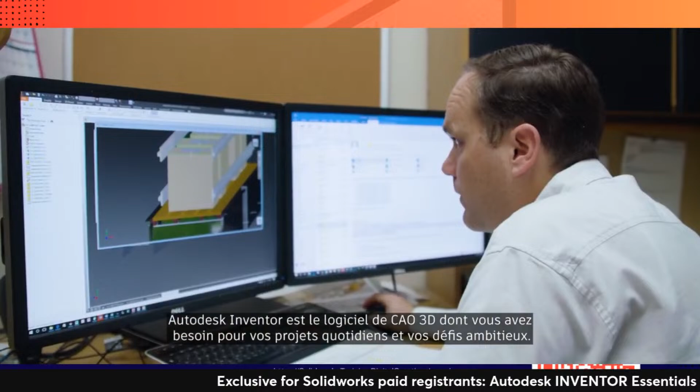From the smallest components to the largest assemblies, Autodesk Inventor is the 3D CAD software you need for everyday projects and ambitious challenges. Inventor puts powerful mechanical design, documentation, and product simulation tools at your fingertips to help you innovate with agility, collaborate effectively, and win more business.

Inventor provides you with a stable and responsive environment to help you get your projects to production faster, with a complete set of tools for sheet metal, welded frames, tube and pipe, and electromechanical, and direct access to a robust content library and engineering calculators.

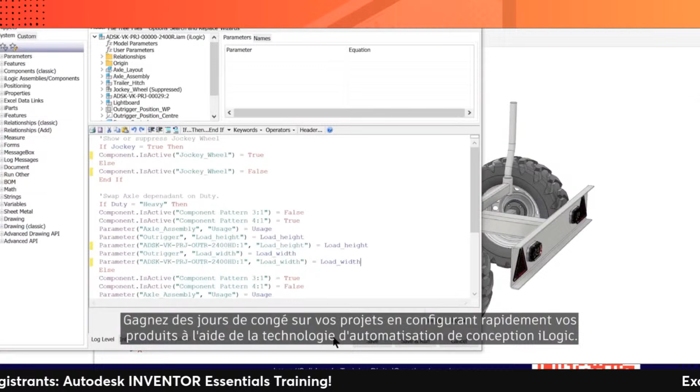Shave days off your projects by rapidly configuring products using iLogic design automation technology. Speed up design reviews with a cloud-based tool that protects your intellectual property. Connect directly with AutoCAD for your project workflows.

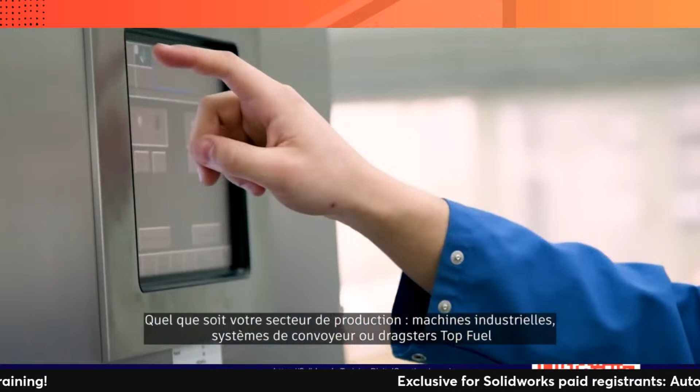And you can extend the power of Inventor with a subscription to the Product Design and Manufacturing Collection to take your designs further with 2D and 3D workflows, cloud-based design and manufacturing, factory planning, and high-end visualization. Regardless of what you make, industrial machines, conveyor systems, or top fuel dragsters, solve your most interesting problems efficiently and effectively with Autodesk Inventor.

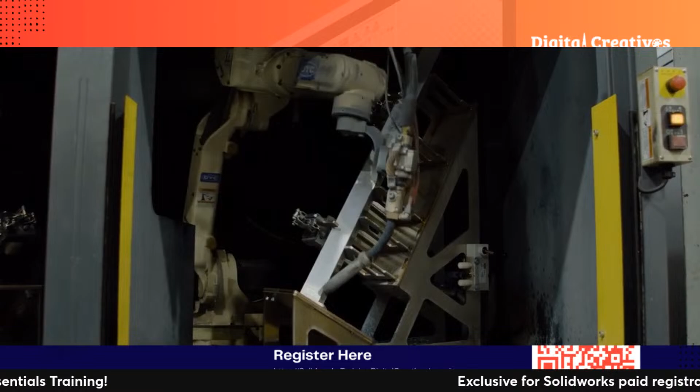A simple project that would have taken 4 hours, we can now do in 20 minutes. And a complex project that would have taken 2 days, we can do in 2 or 3 hours.

We design, manufacture, deliver, and install custom staircases. Every system is new for that customer, so every system is at least a sixteenth of an inch different. We're often one of the last products that gets installed in a home, and if we don't get it right, we can delay them getting a certificate of occupancy.

Without iLogic, it took quite a bit to draw even the simplest of orders. It was very disheartening how much manual labor went into it. We could draw maybe one order a day.

We turned to the Autodesk Product Design and Manufacturing Collection. Autodesk Inventor and iLogic has allowed us to automate the engineering or project management process. A lot of things in stair design are repetitive tasks, and iLogic enables us to automate a lot of those so that a human operator doesn't have to get lost in the minutia.

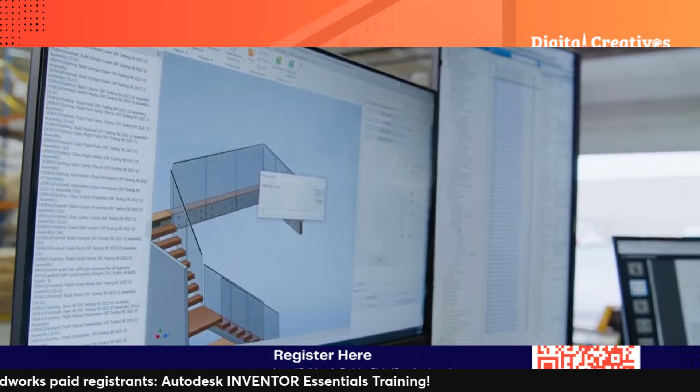So let's say we decided to pull a foot off of that floor, we added a wall there. I would come in and modify the environment here, tell it for length, put in either an absolute, or in this case, if they said we'd subtracted 10 inches, I'd do it. And I would just tell it to update all my glass.

It's going to automatically engineer it for me. It's going to make it so that it meets all building codes that our product is certified for, and it's going to generate shop drawings and production prints for these as it goes. It's that easy. We're manufacturing 10 systems, 20 systems a day right now.

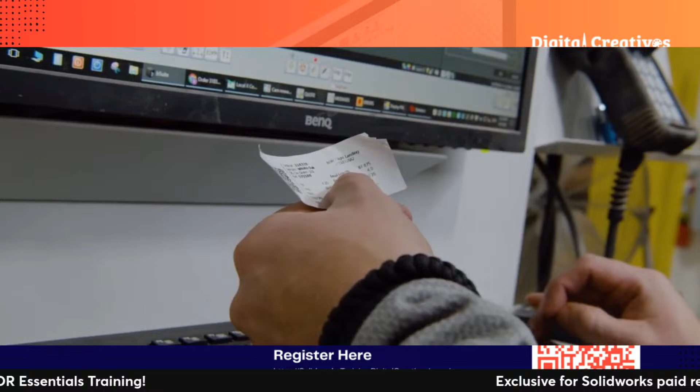With the Inventor CAM, we take the exact model that is part of our automation that we've used to design for the customer, and it's already toolpathed. So that production engineer is just posting that right to the machine. It's a huge time savings, and it's a quality assurance. As we build in more and more automation, we continue to drive down the potential errors that a user can make.

Welcome to Viewrail. Thank you. Have a seat.

We leverage the Forge viewer. It enables the customer to view on a web page on their phone exactly what we are engineering and how it will fit into their space.

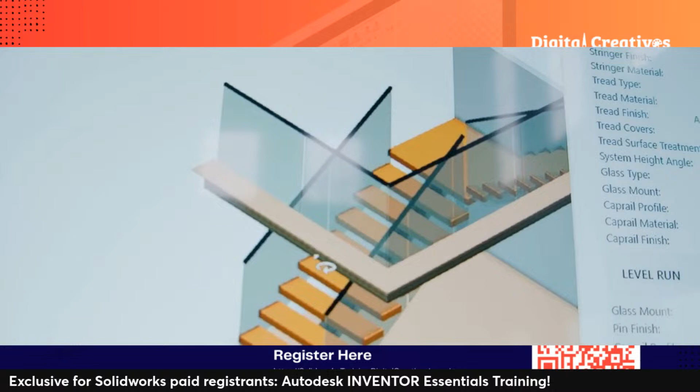This looks amazing. We are now over 10 times the size that we were when we started all of the automation. Then in the next 5 years, we're going to grow from $100 million a year in revenue to $500 million. Automation is critical for scaling at the rate that we're going. We would not be able to do the things that we are doing today and looking into the future without the Autodesk tools.

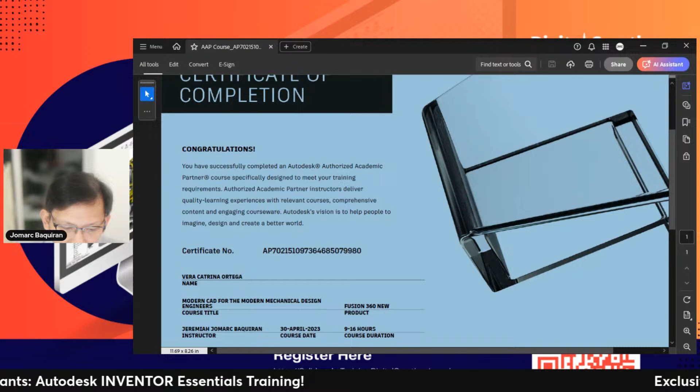All participants will receive an Autodesk certificate of course completion. When we say course completion, you are required to do some tasks. This is not something where you just watch and get a certificate. You will submit the required task. Of course, learning is doing, not just watching. So again, those who participate and submit the required task get to have an Autodesk certificate of course completion.

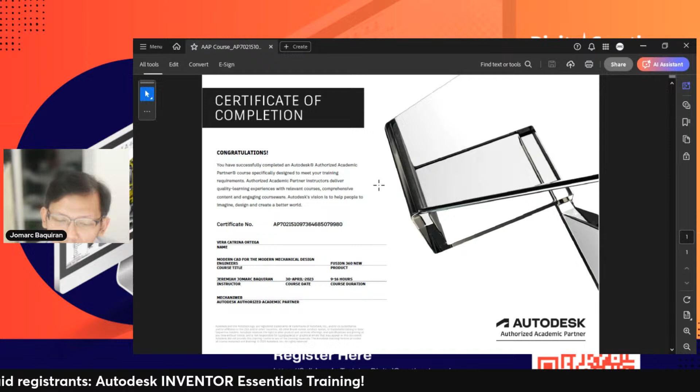This certificate is unique. It has its own serial number. You can place this on your LinkedIn profile. Of course, this is just an example, you're seeing Fusion 360, but you'll be receiving one for Inventor, since this is an Inventor training.

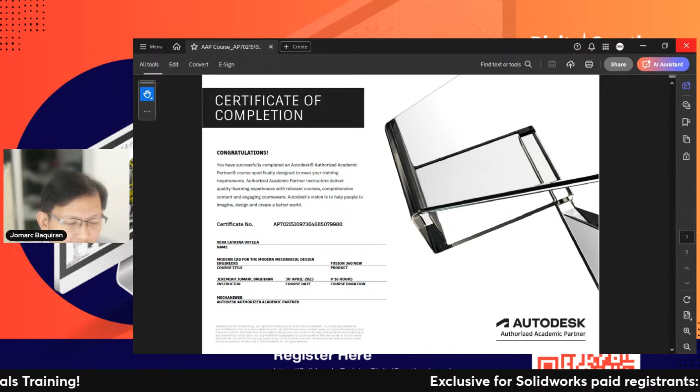Good morning from the Netherlands. If you have someone from Netherlands, I don't know if it's good morning there, but here it's good afternoon.

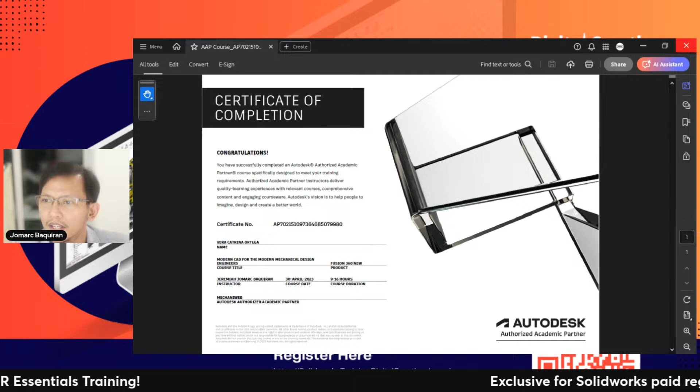Giving you ample time, requesting everyone to start up that Inventor software. I have gone ahead, I already have my Inventor with me. I'm going to close this, going back to the default mode. You can actually open it - I have multiple instances of Inventor opened here.

These cars go over 330 miles an hour and they travel 1,000 feet in less than 3.5 seconds. To accomplish something like that is really tough on the parts. This is not a business where you can make a ton of mistakes. If we don't do our job down to the smallest detail, that driver's life is in our hands. Everything has to be built right. Everybody has to be on their game.

Welcome to Charlotte's Z-Max Dragway for the 4 Wide Nationals. Safety is number one, and then second would be performance. We need to make sure our equipment's strong enough and light enough where we can outperform our opponents. Currently, they're finishing up the track prep. We've got Top Fuel Dragsters up next for you. At the 4 Wide Nationals, we had the Autodesk car on Doug Kalitta's Top Fuel Dragster. My expectation is to win every race we go to.

In lane 2, we have Doug Kalitta with the Autodesk car. So Inventor is helpful because races in our league can be decided by 1,000th of a second. So if we find something on a part to make it a little bit stronger, a little bit lighter, or a little bit better than what everybody else has, that makes us a big part of winning races. Kalitta crossing the finish line first, clocking in over 330 miles per hour. Seeing something get made and then get put on the race car and us going out and running over 300 miles an hour, that's pretty neat to see.

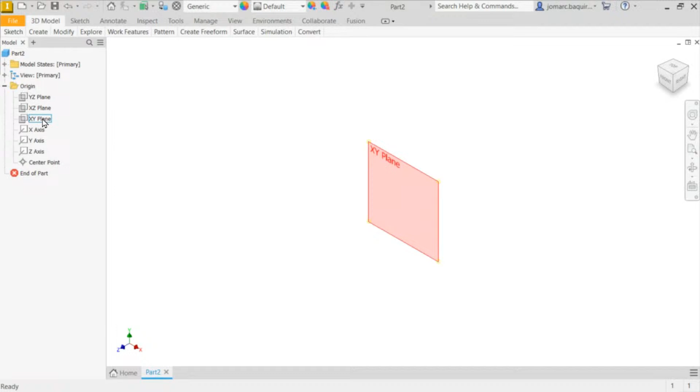Let's first be familiarized with the navigation. I want you to head over to the XY plane. Again, on the browser or the model tree, click on XY plane, right click and select New Sketch. So again, our view is normal to the XY plane.

I'm going to cycle over these controls and I want to see the full view of my ribbon. Again, I click this minimize to panel button. So again, for the absolute beginner, let's get ourselves familiarized with the controls and navigation.

I'm going to click on rectangle. Left click here, left click here. I'm not too concerned about the dimensions. The rectangle tool is still active, so I'm going to hit escape and select finish. Whenever you see this green check mark, it's a visual cue that we are in sketch mode. So I'm going to click on finish.

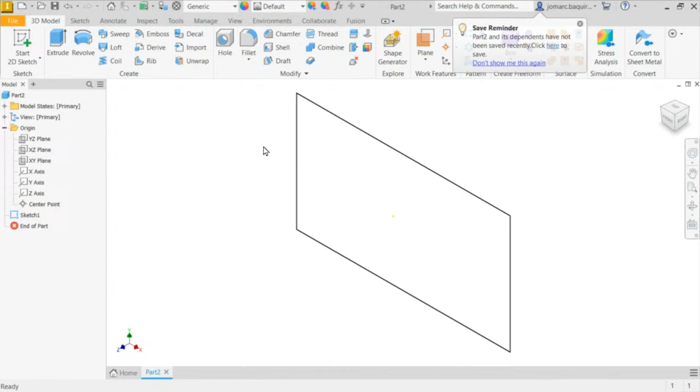Okay, next I'm going to hit extrude. It automatically selected this profile. Let me pull this arrow, giving this a height or depth, and select OK. So as quick as that, we have created a 3D model coming from a 2D sketch.

For the controls, if I roll out my scroll wheel, I want you to roll this until it's completely far away. To bring this back to the full extent of our screen or canvas, I'm going to double click on my middle mouse.

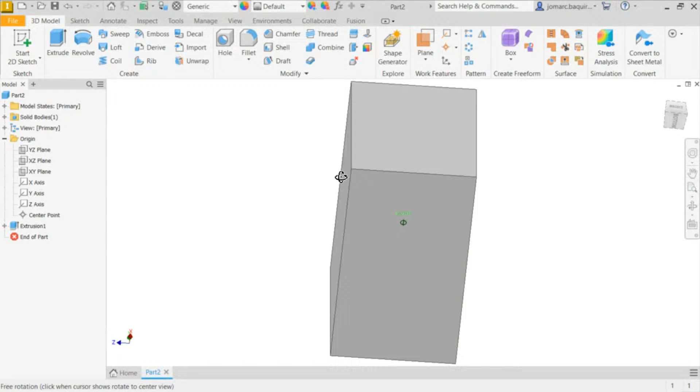Okay, what I did was double click on the scroll wheel or middle mouse. To rotate this, it's shift and holding our middle mouse. I'm rotating or orbiting this 3D model. To go back to the default isometric view, it's hitting F6. And if I would like to pan the view, it's holding the middle mouse.

Notice that hand when I'm pressing the middle mouse button - so I'm panning, currently rotating. And if I hit F6, it goes back to the default isometric view. So feel free, giving you a few minutes, few seconds to be familiarized.

Okay, so hope you are familiarized with the navigation already.

Next, notice as well on our model tree, a recording of our actions was made. Initially, pay attention to your left side of the screen. Recall we created a sketch, right? And then we created an extrusion, and that sketch was consumed by this extrusion.

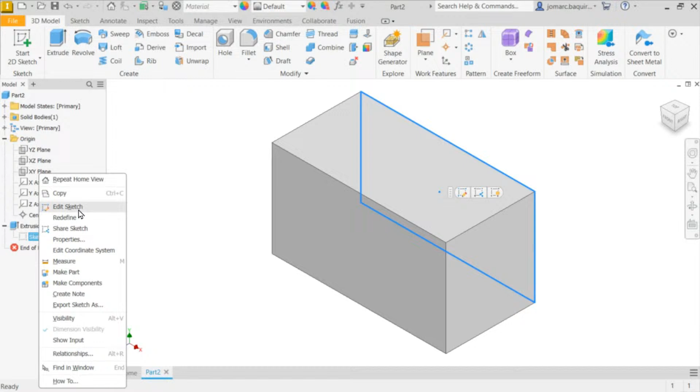So we're now again in sketch mode. Again, the visual cue is this green finish check mark. I'm going to create a window selection - same as AutoCAD. This is window, and this is window crossing.

Notice the difference: for window selection, the one to be selected needs to be fully inside this rectangular pinkish rectangle. So if all of this rectangle is inside this window, everything will be selected. For crossing, whatever this window hits gets selected - so if I create a window selection here, this side, this entity or line will not be selected.

So again, creating a window selection, right click or hit delete. I want you to select delete. So we're creating a fresh or new sketch.

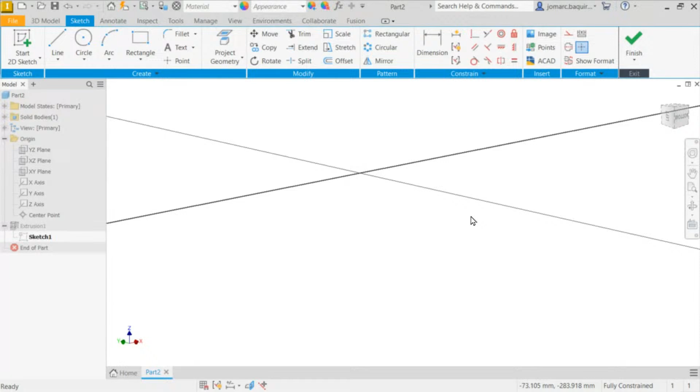Since initially we were in the XY plane, I can simply head over to the view cube and select front. So heading to front view.

Now let's create some sketches. Of course, the mastery of part modeling and assembly modeling all starts with the sketch. Everything starts with sketch, even for those in animation or character modeling. If you have a character, it all starts with the sketch. So let's say the character model will be made in Maya 3D. That 2D sketch can be inserted into Maya to create that 2D into 3D. So it all starts with a sketch.

For me personally, my definition of sketch is a quick drawing. If your boss told you to create a sketch of a table, it's a quick drawing of a table. So again, we are in sketch, meaning we have to be quick, or hoping in the future you have the ability to do quick sketches.

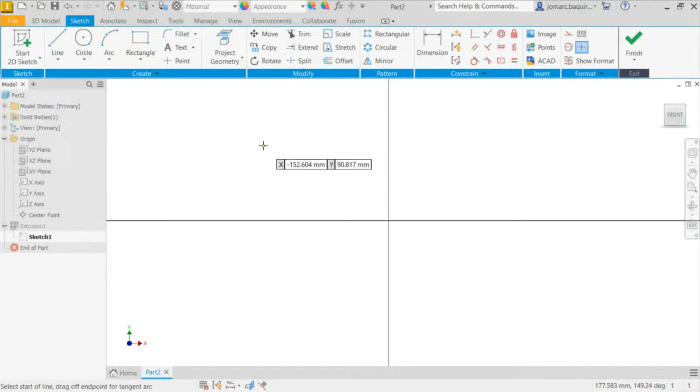So for now, I want you to select line. Similar to AutoCAD, the shortcut key for that is L. Again, hitting escape to disable that command. So notice if I hit L...

This command is highlighted. I want you to left click here, one left click, double left click. And if I'm going to create another line, left click, left click, left click, double left click. So if I simply do a left click, I am creating a chain of lines. And if I ever wanted to terminate this chain of lines, I'm going to double left click.

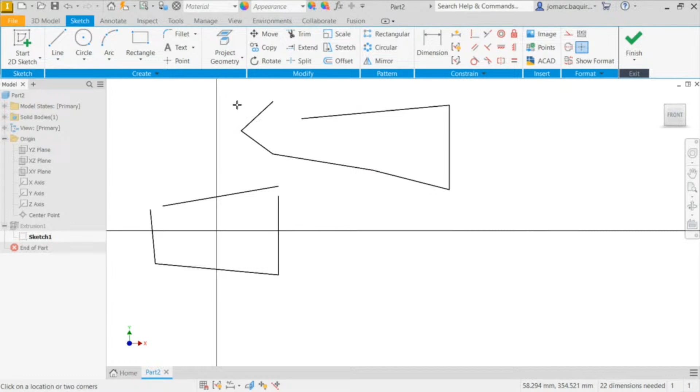So I'm going to delete these lines. To delete a line, simply select that line or create a window or crossing selection, then hit delete. So this is what we have created so far.

By default in Inventor, it adds constraints, and those constraints are initially turned off. So if I hit F8 and F9 - F8 is for the constraints to be visible, and to turn off its visibility it's F9. So notice here, if I select F8, automatically one of the lines that I have created has a vertical constraint.

Which means when you say constraint, it's sort of like you are shackled. This is constrained to be perfectly vertical. So whatever I do, if I select this endpoint and drag this around, select the whole point and drag it around, it's completely vertical. And again, our set of constraints are located on the top ribbon under constraint.

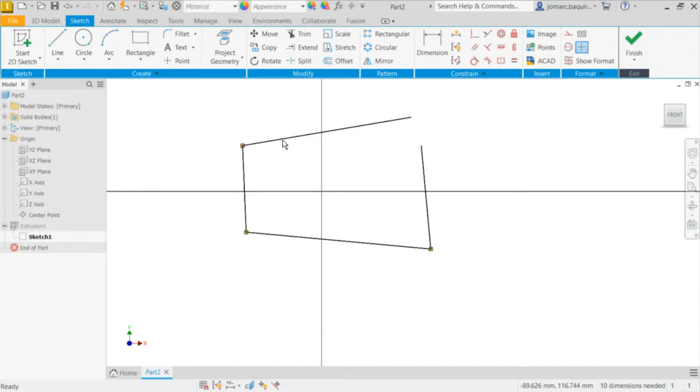So the difference between Inventor and SolidWorks is there's a consistent pressing of F8 and F9 for you to not accidentally select the constraint itself.

Next, I want this top line to be perfectly horizontal. So I'm going to head up, selecting horizontal, or the minus sign, selecting this again to be perfectly horizontal. Same with this line, horizontal. And for this to be vertical, I'm going to hit I, or simply head over to our constraints, select vertical constraint, and select this line.

So our objective here is to create a rectangle. Next, I'm going to have these two endpoints coincident with each other. Selecting coincident, selecting this point and this point, hitting escape.

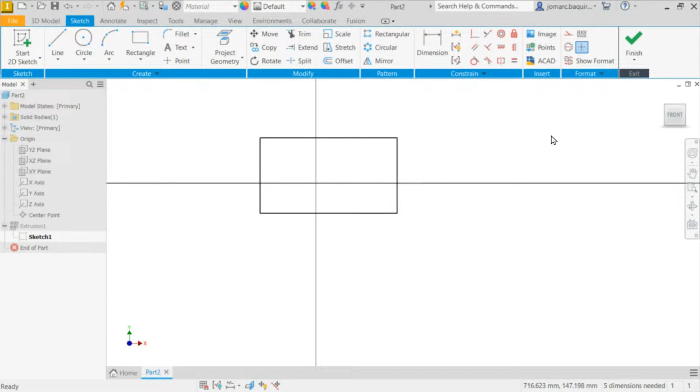So next, how about creating some two diagonal lines here? Left click, double left click, double left click.

In addition to that, we'll be having an activity, or your assignment. So like for this challenge...

For this challenge, the top horizontal line and bottom horizontal line are actually parallel as well. But of course, another method of making these two parallel is, of course, making them both horizontal.

So again, demo for making things parallel - selecting parallel. Notice the constraint symbol. And if I drag this, they are perfectly parallel with each other.

So, question: what is the angle created in a perpendicular situation? I'm going to hit L, create another line coincident with this diagonal line, and double left click.

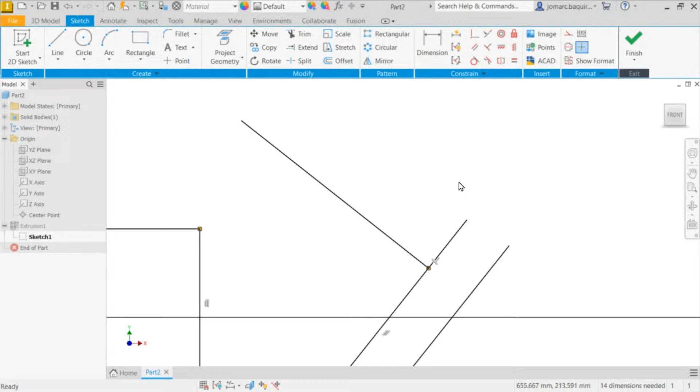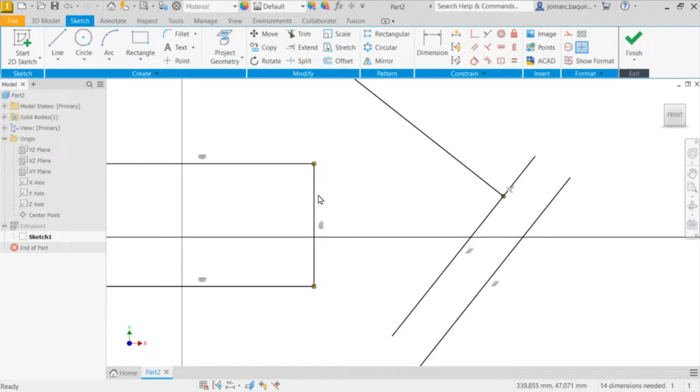Zooming in. Notice if I hover over the constraint symbol, it highlights the two entities sharing the same constraint. This line and this line are both in a perpendicular constraint. Hovering over here, both these diagonal lines are parallel. Hovering over here, this one is horizontal and vertical.

Requesting everyone to follow along. We're currently familiarizing ourselves with the constraints. This is very essential. You'll have difficulty in assembly and part modeling if you don't have a grasp and mastery of constraints. Of course, in SolidWorks, it's called relations.

Okay, perpendicular done. Let's create a new line again somewhere around here. Left click, double left click. And my next intent is to have this line and this line collinear with each other.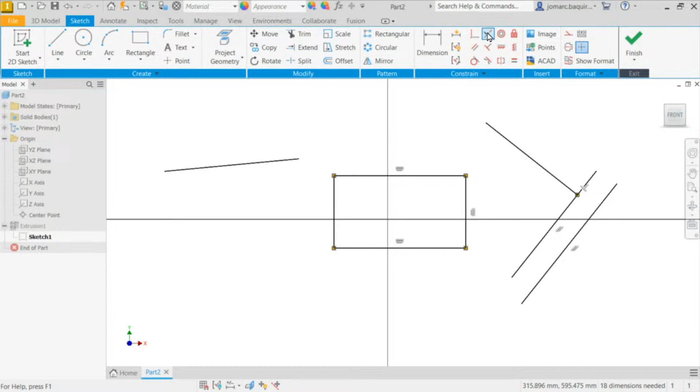The best way to do that is heading over to constraints and selecting collinear constraint, then selecting this line and this horizontal line. Hitting escape, moving this.

Turning the visibility off for the constraints. I'm dragging this line on the left. Notice the other line on the right is following the up and down movement of this line, because they are both collinear with each other.

Okay, next I'm going to delete these lines, selecting and deleting them all. Now about creating a circle. Let's create a circle. Shortcut key for that is Control-Shift-C.

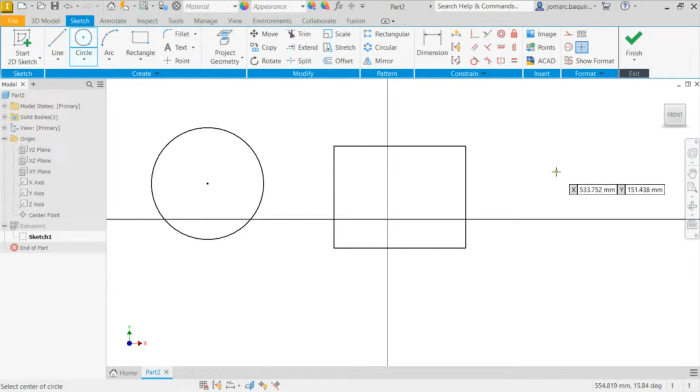Creating another one here, another one here. I want you to create 2 circles. Because this doesn't have any dimensions yet, the diameter is not yet defined for these 2 circles. So I can resize them by selecting its circumference, resizing this, placing it here, placing it here.

Again, feel free to experiment, to be familiarized. Taking things slow.

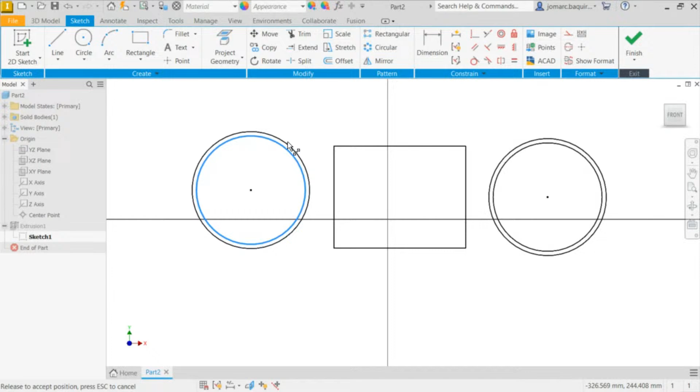Okay next, let's discover equal constraints. Selecting equal, selecting this circle, hitting escape. If I resize the right circle, because they are both equal, what I do to this right circle is the same. So both are now sharing the same diameter. This applies to everything as well.

Same as with lines. So creating 2 lines, another line here. I want them both to be equal in length. Selecting equal constraint, selecting this line and this line. So both now share the same length.

Deleting these 2 lines. Same as well when you create arcs. The radius of that, if you apply equal, definitely both of them would be equal.

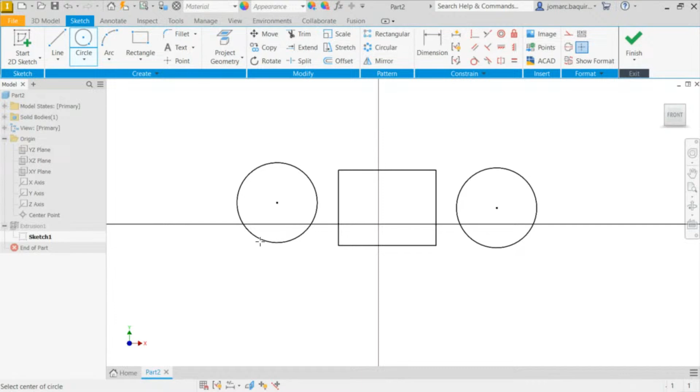Okay, going back. We now have discovered the equal constraint. Let's create another circle, this time much smaller, somewhere around here. Again, requesting everyone to follow along. We now have 2 or 4 circles and a rectangle.

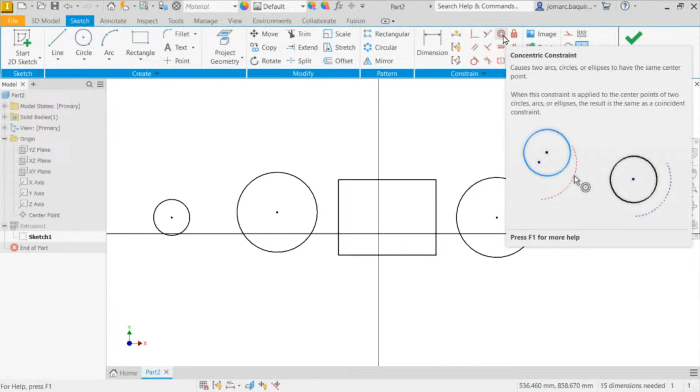Next, let's discover concentric. For concentric, the center points of those 2 circles become coincident, that's actually what concentric does. If I select concentric, selecting this large circle and this smaller circle, notice the center points of these 2 circles are now coincident with each other.

Repeating what we did to the right circles, selecting this, selecting this. The last selection will be the destination of the first partner of that circle.

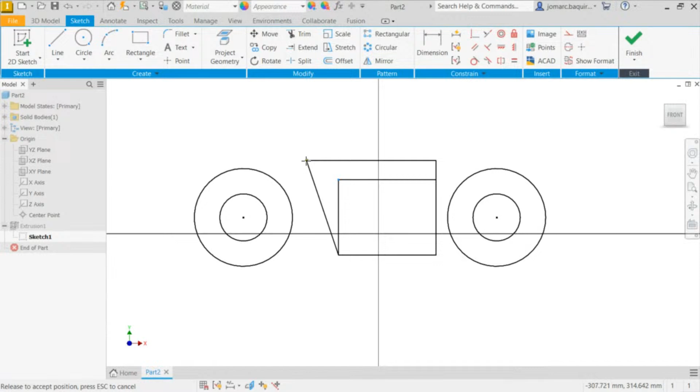Again, I can resize this. Notice this line is not perfectly vertical, so let me add the vertical constraint to this line. Hitting escape, resizing this.

Okay, next, how about discovering tangent constraint? Selecting tangent, I'm going to select this horizontal line and this circle. Hitting escape, turning on our constraint visibility with F8. Hovering over, notice this circle and this horizontal line. F9 to turn off, and if I drag this line up and down, notice the effect of the tangent constraint.

Let me apply another tangent constraint to this bottom horizontal line and this circle. I'm going to hit escape. Now if I resize this circle, notice the effect again.

I want you to drag and resize. Again, requesting everyone to follow along. If I move or select the center point, notice the effect of that tangent. Let's apply the tangent as well to this other side, selecting horizontal, the circle, horizontal, and the circle.

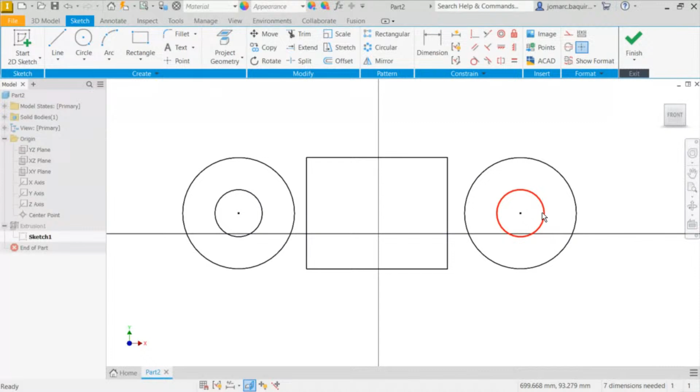So if you see that prompt earlier, a few seconds ago, it's mentioning an over constraint, a conflict of constraints.

Okay, let me resize this, move this around here. Next, I want you to place the center point at the midpoint of this vertical line. There's actually no midpoint constraint, it's located in the coincident constraint. Our intent is to have this center point be coincident with the midpoint of this line. So selecting coincident, selecting this center point and this midpoint.

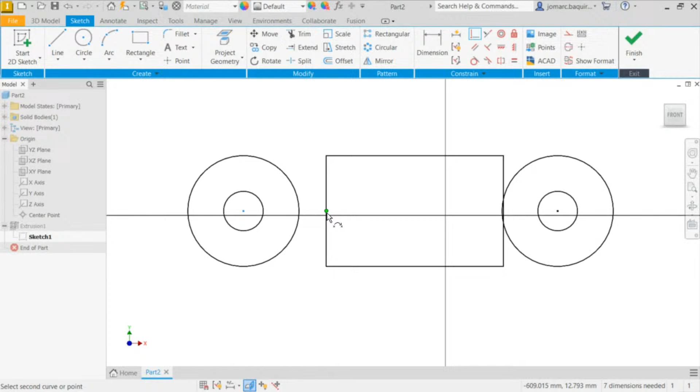If I hover over this vertical line, there's a green dot indicating that that's the midpoint. So selecting this, repeating the steps here as well, selecting this center point and this midpoint, hitting escape. Let's resize, let's drag, let's check.

I can also create a window selection and drag them all at once. Dragging them somewhere around here.

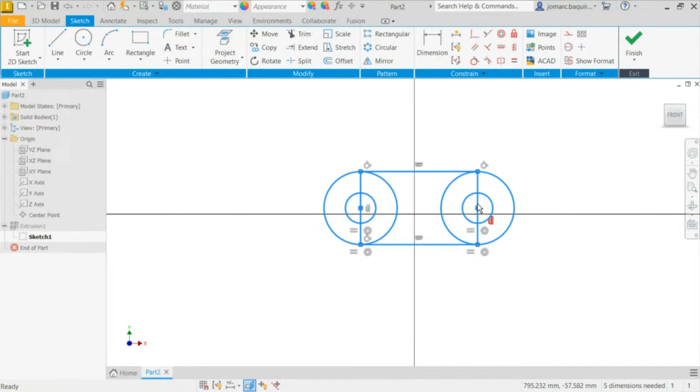So notice earlier I mentioned about the 3 initial planes, and recall in AutoCAD when we create a line and we want it to be at the 0 coordinates, we do at 0, 0. Recall that? When we want the line to be placed at the origin, XYZ 0, 0, 0.

So the difference with Inventor, we can do that right away. Actually that 0, 0, 0, the XYZ 0 coordinates, is hidden by default, and it's actually this center point. Notice that yellow dot, that's actually the center point.

And obviously for this sketch or geometric figure, the center point of the sketch is of course somewhere around here, the geometric center. Now it's a good practice to have those geometric centers and the center point, the 0, 0, aligned. But of course it depends on the need. By default I want you to have that thinking that geometric centers and the origin, it's preferably having them both to be coincident.

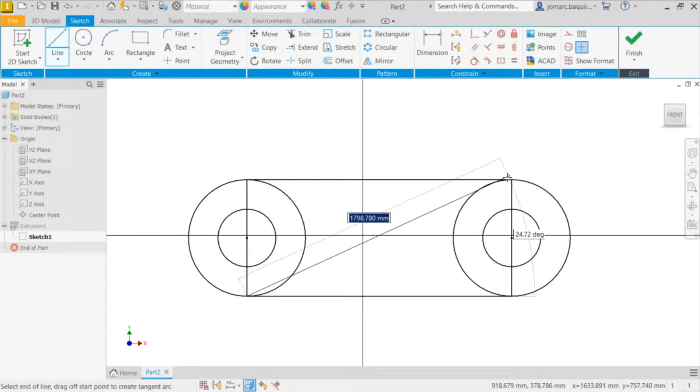So next, the next task would be I want the geometric center of this sketch to be coincident with our center point. So one way I am seeing is to create a line coming from this endpoint going to this endpoint.

Next, I want this diagonal line's midpoint to be coincident with the center point. So to do that, I'm going to hit coincident, select that midpoint, that green dot, left click. And because the center point is not visible, I'm going to head to our model tree and select center point. Again, I have selected center point.

So now, this is perfectly at the center together with our center point, 0, 0.

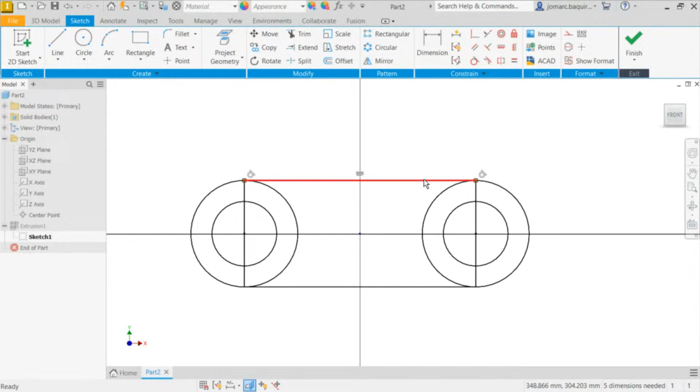Another way I'm seeing is to possibly delete that line, align them, align this, the midpoint of this line, align it vertically with our center, same with this line as well. So let's check. I'm going to select vertical constraint, selecting this midpoint and our center point.

Let's check. Okay, and I think I'll be having an over constraint if I select this center point and our center point. Okay, so they are actually...

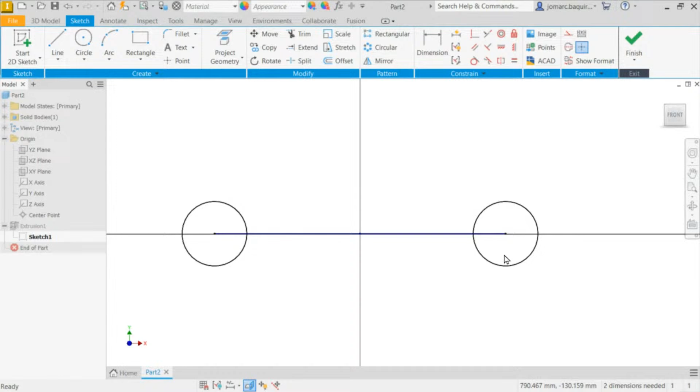So this is why it's important to resize and drag things to check what constraints needs to be applied or what's missing, what needs to be done. So I'm seeing here, I no longer have the need to apply the horizontal constraint.

And notice as well, our entities are in the color of black. Everything is black right now.

So next, we now have our target shape. Let's now fully define this geometry or geometric figure by selecting D, or heading up again to constrain.

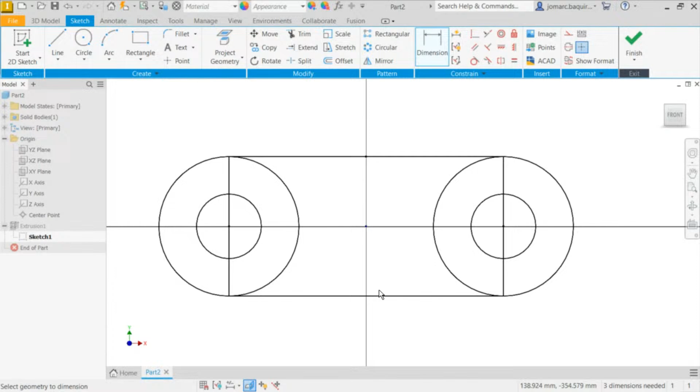On the left side, there's dimension. I'm going to select this. How about selecting these two vertical lines? I'm going to key in 100. Zoom in, or I'm going to pull this dimension over here.

Again, hit D for dimension, selecting this circle, and I prefer the dimension to be 50. So notice the change of colors, from black it's now dark blue. And the remaining black entities in color black are these two circles.

So to turn this into dark blue as well, I'm going to hit D again, define this, its diameter to be 25. So notice everything now is in dark blue. I'm going to hit F6, revolve.

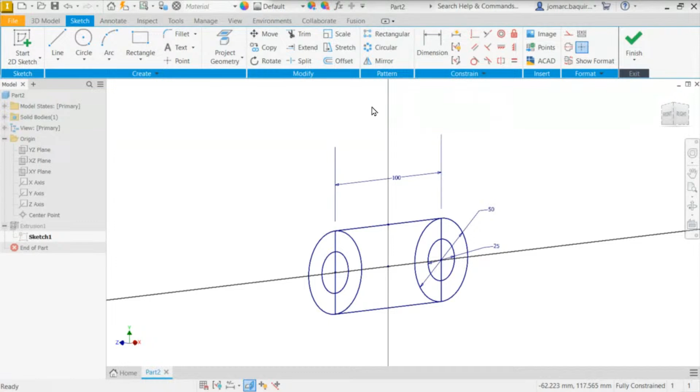Okay, head back to front view. So from here, I can now hit finish sketch. And of course, we have an update.

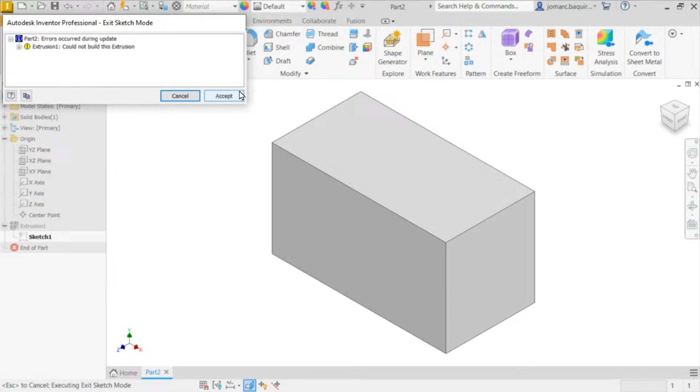Okay, this was previously a rectangular extrusion. Now it's a sort of slot type. I'm going to hit accept. Now I am forced to go back to extrusion. I'm going to hit edit feature and reselect these profiles.

So these profiles, okay, so again, right click, edit feature, creating a window selection. Again, I have created a window selection. And from creating a window selection, I have selected 9 profiles.

And as I mentioned in 2D, we always prefer things at the center. Same as well in 3D. So I'm going to change the direction to symmetric. Let me drag this arrow. I prefer this to have a thickness somewhere around, what about 10? Okay, I prefer 10.

Hitting enter. Hitting F6 for isometric view.

So, of course, in design, aside from the only constant thing in this world being change - definitely in design, there's always changes. May it be from the customers, from your boss, and I hope not from your wife.

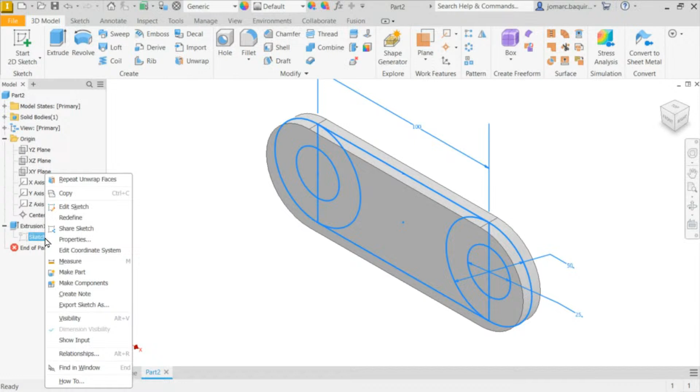Okay, so heading back to sketch, let's say there's an update. We're required to have the pitch to be 110. So double clicking 100, double left click again this dimension. Let's say I prefer 110. Hitting enter. So notice it updated, selecting finish, and it's now 110.

So I know that because if I select this edge, okay, or under inspect, I select measure. If I select this edge, of course, confirm it's 110.

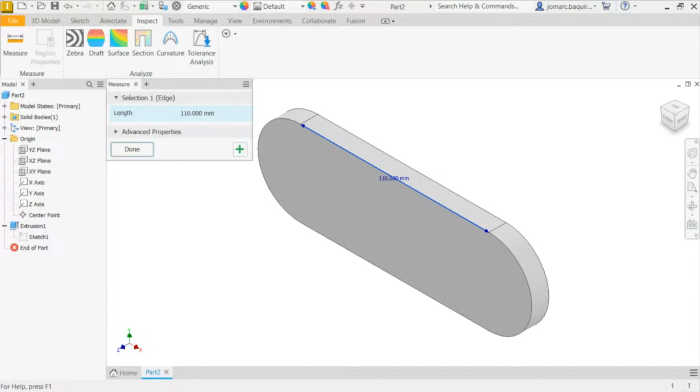Yeah, okay. So I want you to of course recreate what we have created. So it's currently 110, 50, and 25. Shout out as well to Sir Anthony Tubera.

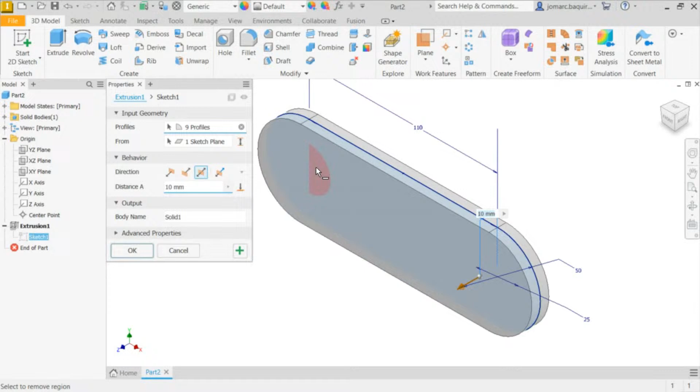Again, so right now I prefer removing this additional profiles. So control left click, heading over to the right side, control left click, control left click. So 5 profiles are now under extrusion 1. So we have now created that hole.

So selecting OK. Again, I want you to update our activity to an extrusion having 2 holes.

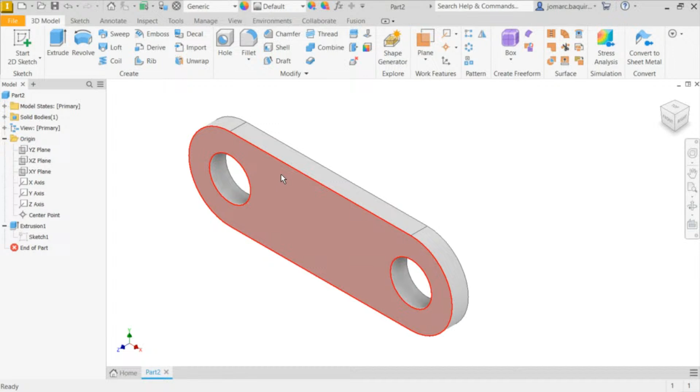Okay, so let's now move on and let me give you a simple activity. I want you to recreate this 2D challenge. Okay, so let me hit Control N. I prefer this to be in metric, standard millimeter.ipt, double left click.

Okay, again, sketch is a quick drawing. So if I was given this challenge, I'm going to be quickly hitting L for line. I'm going to sketch, I prefer on the XY plane. And I'm going to create this type of sketch. I'm going to create a circle here.

So this is my quick sketch of this challenge. And notice as well for this challenge, again, all dimensions are referring to this point, which means I'm going to have this point and that point, which is our center point, coincident with each other. So I'm going to select coincident, selecting this point and our center point.

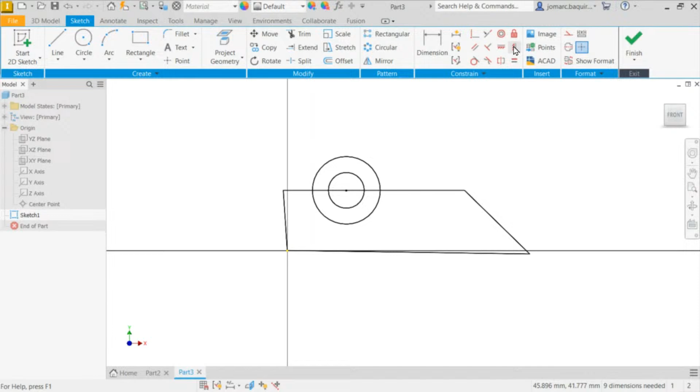Okay, so next, of course, applying the obvious. This needs to be vertical. I'm going to select vertical constraint. This one to be horizontal. This one to be horizontal. And from here, again, I can now apply the dimensions.

So what are those dimensions? 120, 25, and 30. So D, 120, 25. Again, make it a habit. I'm going to hit undo or delete this.

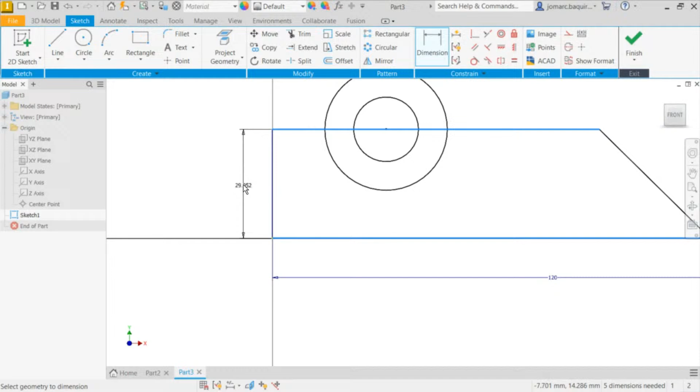What is actually indicated as 25, it's not actually these points. So imagine if this is undergoing QA, I have a caliper and I'm going to measure these two distances. It's actually the caliper will land on this line and this line. So that's why I'm highly suggesting, instead of selecting these 2 points, when you create that 25, you should select this horizontal line. Again, 25.

Dimension still active, selecting this line and this center point to be 30. Okay, what else? This one needs to be 45.

Okay, showing you again the activity. We're missing the 20 diameter, the radius, that arc to be 20 in radius as well. So again, 20 inside. So D, this one to be 20.

And again, the challenge, notice the challenge. It's actually one circle only. So to do that, I'm going to head over to modify, select trim. I'm going to trim out this line, this arc, this line, this line. Again, make it a habit to select the entities and move them to check.

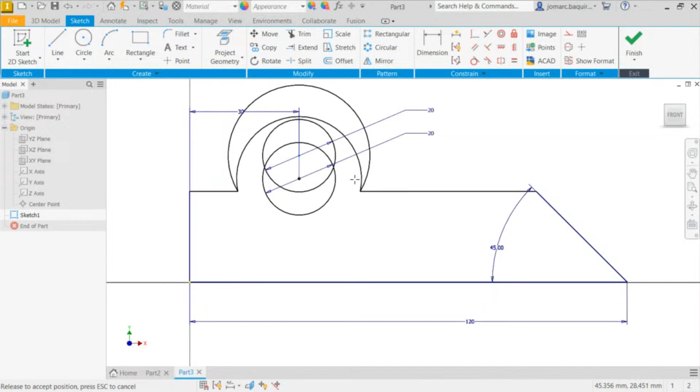So moving this. Okay, the question is, my question to our participants: what constraint is needed for this situation? So the answer, to prevent this or to have this line aligned horizontally, as I've mentioned, we need the horizontal constraint.

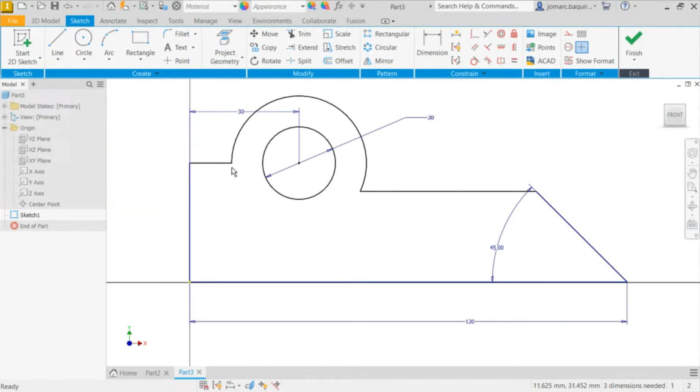So selecting horizontal. Again, horizontal constraint is not only applicable to lines but to points as well. So selecting this center point and this point. Let's check. Okay, so these 2 points are now perfectly horizontal with each other, but this one was left out.

So from there, if you can recall, we discovered earlier the collinear constraint. So selecting collinear, selecting this line and this line. So checking, moving them all. So what am I lacking?

I'm lacking again the 25 dimension. So selecting this line and this line. 25. Next, because I trimmed out that circle, it's now losing its dimension.

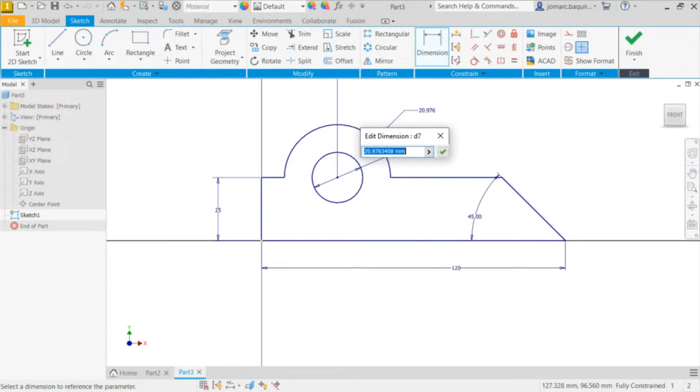So again, if you move things, you'll discover what needs to be done. So here, we need that radius. For this radius, for this arc, it needs to be 20.

Everything now is in dark blue color, meaning if I forcibly move these entities, it won't move because it's fully defined, fully constrained. We're now done with this activity, selecting finish.

Okay, and from here I can now extrude this, selecting this profile, selecting symmetric, and feel free to add what thickness you prefer. So I prefer 10. Okay, hitting F6 for isometric view.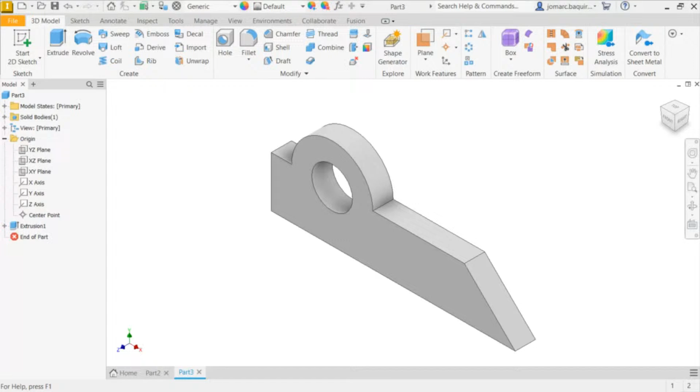So I'm going to be leaving 2 challenges for you, and on our next meeting we'll be discussing how to create those 2 challenges. It's not actually 2, it's 3.

So I want you to screen capture this challenge number 2. Screen capture this, and this would be challenge number 1. Okay, 3. This would be 3.

Challenge number 3. So to our participants, again, screen capture this, or feel free to go back to our videos. Okay, that would be 3.

And for the last challenge, my challenge for you would be, imagine looking at this on this side. I want you to create only the sketch, not in 3D. One sketch only for this 3-part model, 3-part assembly.

Again, I want you to create the sketch only for this. So for that one, I want you to screen capture this. Again, it's an additional assignment. I'm going to hit Control N.

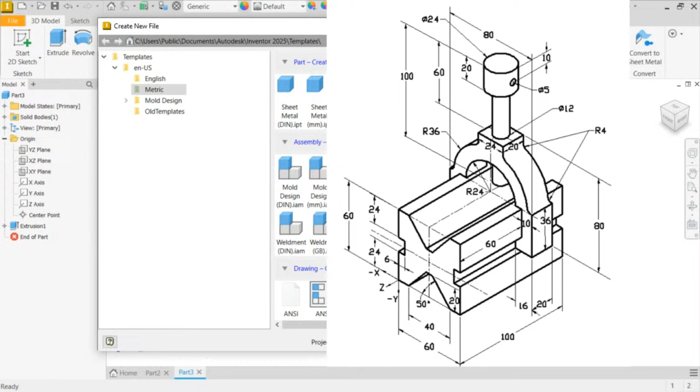Okay, let me turn this off. This is what I would like you to do. So I'm creating another part in millimeter. Okay, I'm going to hit Control Shift R. Not Control Shift R.

I'm going to hit line. Okay, on the XY plane, and I'm going to select 2-point center. This is what I would like you to do for that challenge.

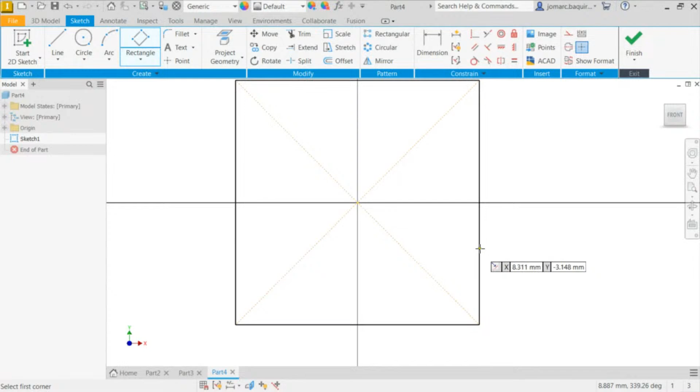I want everything to be on sketch 1, so no multiple sketches. So for that, recall there's a slot there for this. Okay, notice here.

Right, recall. Let me show that challenge once more. Okay. And there's, I'm going to create a line here. Right?

And for that peg, going to create a rectangle somewhere around here. Somewhere around here. Creating a quick sketch again. Somewhere around here. Again, showing you the challenge for

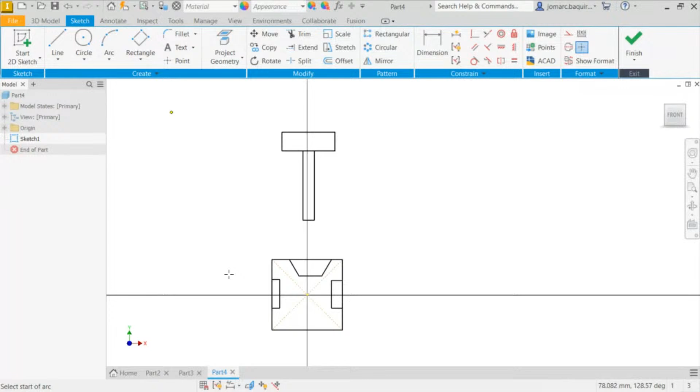that second part, which is based from an arc. So I want you to create that arc as well. So somewhere around here, right? We have an arc.

So again, for this challenge, I want everything. Notice here, I'm on sketch 1. I'm doing the sketch for this part, and for this part.

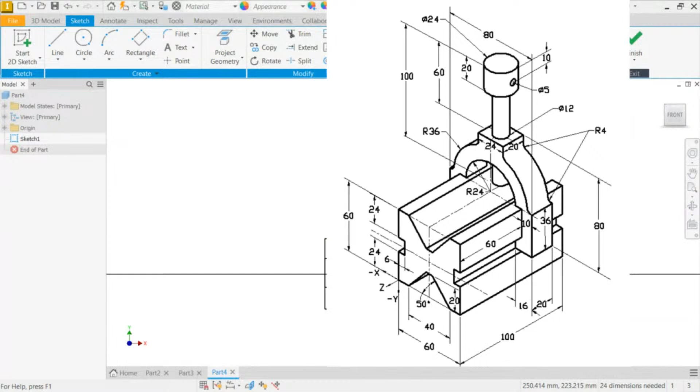Okay, so this challenge, and this challenge.

Inventor provides you with a stable and responsive environment to help you get your projects to production faster, with a complete set of tools for sheet metal, welded frames, tube and pipe, and electromechanical, and direct access to a robust content library and engineering calculators.

Shave days off your projects by rapidly configuring products using iLogic design automation technology. Speed up design reviews with a cloud-based tool that protects your intellectual property. Connect directly with AutoCAD for your project workflows.

And you can extend the power of Inventor with a subscription to the Product Design and Manufacturing Collection to take your designs further with 2D and 3D workflows, cloud-based design and manufacturing, factory planning, and high-end visualization. Regardless of what you make, industrial machines, conveyor systems, or top fuel dragsters, solve your most interesting problems efficiently and effectively with Autodesk Inventor.

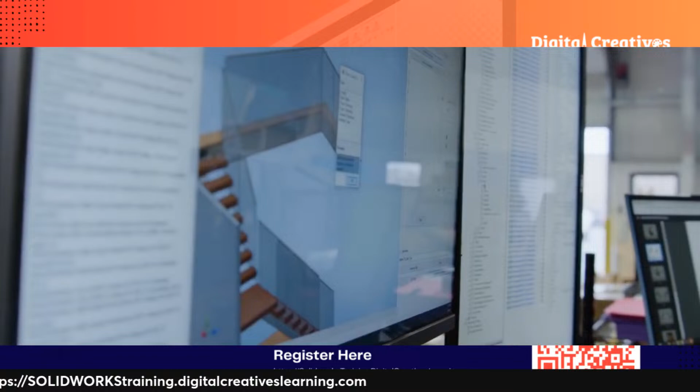So let's say we decided to pull a foot off of that floor, we added a wall there. I would come in and modify the environment here, tell it the length, put in either an absolute, or in this case, if they said we'd subtracted 12 inches, I'd do it. And I would just tell it to update all my glass.

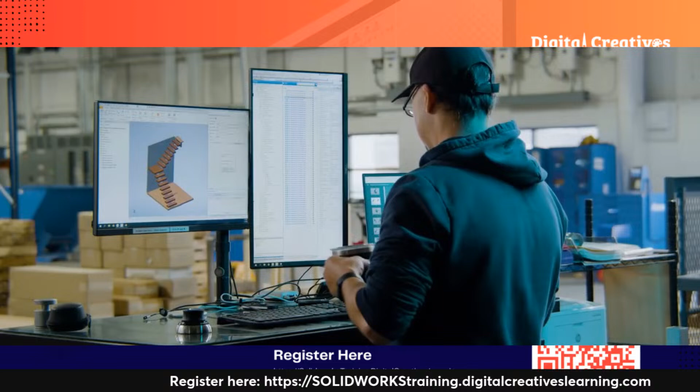It's going to automatically engineer it for me. It's going to make it so that it meets all building codes that our product is certified for, and it's going to generate shop drawings and production prints for these as it goes. It's that easy. We're manufacturing 10 systems, 20 systems a day right now.

With Inventor CAM, we take the exact model that is part of our automation that we've used to design for the customer, and it's already toolpathed. So that production engineer is just posting that right to the machine. It's a huge time savings, and it's a quality assurance. As we build in more and more automation, we continue to drive down potential errors that a user can make.

Welcome to Viewrail. Thank you, have a seat. We leverage the Forge Viewer. It enables the customer to view on a web page on their phone exactly what we're engineering and how it will fit into their space. This looks amazing.

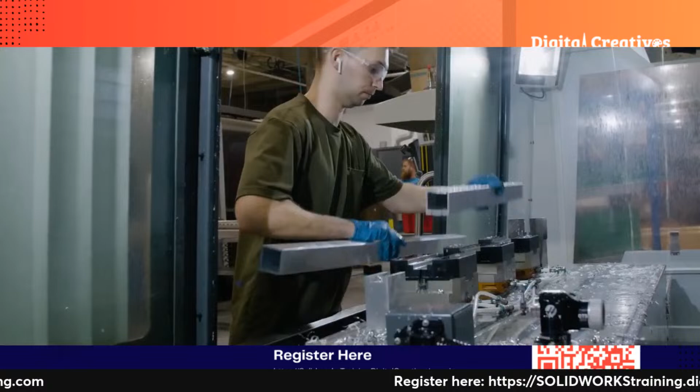We are now over 10 times the size that we were when we started all of the automation. Then in the next 5 years, we're going to grow from $100 million a year in revenue to $500 million. Automation is critical for scaling at the rate that we're going. We would not be able to do the things that we are doing today and looking into the future without the Autodesk tools.